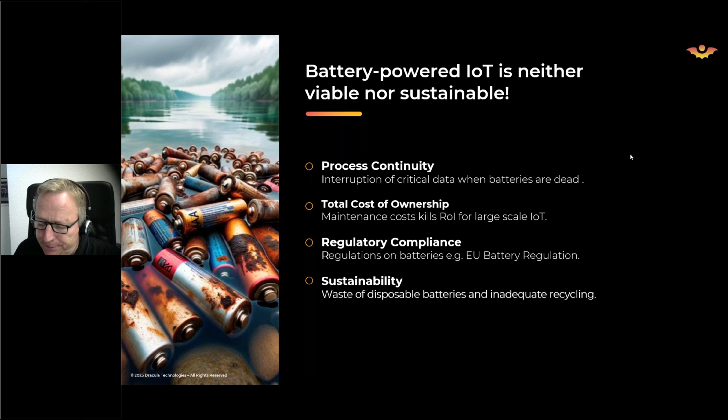Graham just mentioned briefly, there's other wireless protocols in the IoT space that are now embracing and adopting energy harvesting into their protocols. Of course, Bluetooth is also getting into this.

We know that a company called Wiliot has RF harvested Bluetooth sensors, which are almost like RFID tags or labels, that are now making their way into the logistics space. We know that the British Royal Mail is using that, and it's kind of a game changer compared to passive RFID.

Then there are other standards like Zigbee that launched Green Power already some years ago. And as Graham mentioned before, Ambient IoT is the credo that 5G, or the 3GPP consortium, is launching. There will be in Q3, in release 19+, an Ambient IoT spec for energy harvested devices, which will make those devices much more energy conservative in transmitting data.

I mentioned TCO, and I brought a case here that I was actually exposed to with a large IT services company globally. They deployed about 50,000 sensors in about 50 buildings, I think in 15 countries.

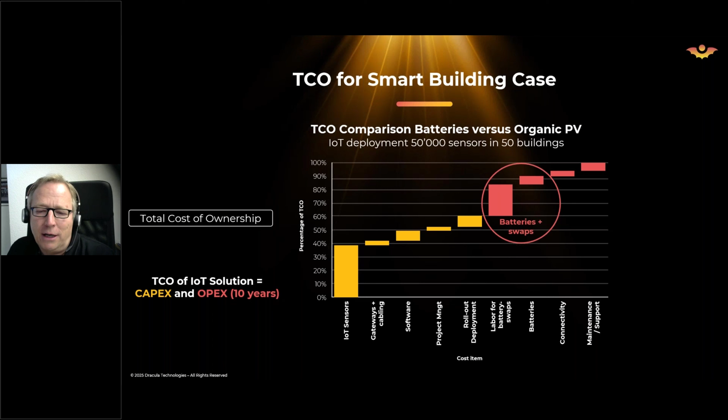The batteries, depending on what type—lithium, alkaline, or something else—are also a significant portion of the cost. Then there's the wireless communication cost, connectivity, and about 5% for overall maintenance and support costs. So you can see the batteries make up a large part of the total cost of ownership. Now, if you benchmark against an organic photovoltaic solution instead of a battery solution, it looks like this.

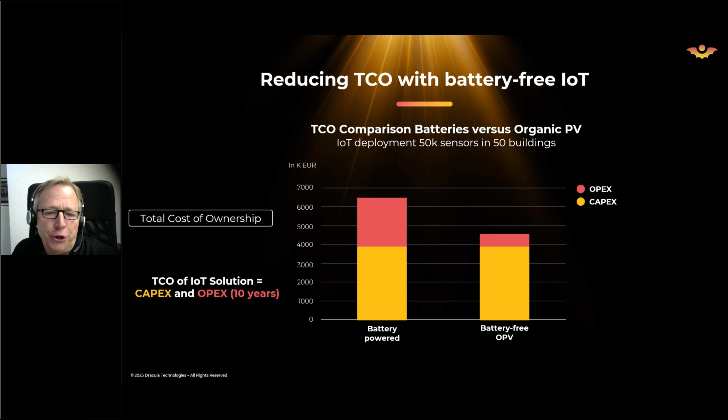We just saw the battery power solution on the left side, and on the right side you can see the OPV-based solution, which has a much lower operational expenditure cost. The battery solution would cost over 10 years about 6.5 million euros, whereas the organic PV solution costs 4.5 million. So they're actually going to save 2 million euros if they do the organic PV solution.

Now, energy harvesting—I don't think I have to tell you, but for those who are not familiar, we are in the light business. My previous speaker, of course, is in the kinetic business. And then there are also other sources of energy harvesting like thermal energy and RF, radio frequency.

Within light harvesting technologies, everybody knows the typical solar cells or photovoltaic cells. They've been very common for 40, 50 years, used in pocket calculators and now on the rooftops of buildings. That's completely different from organic photovoltaic, and I'll show you in a minute.

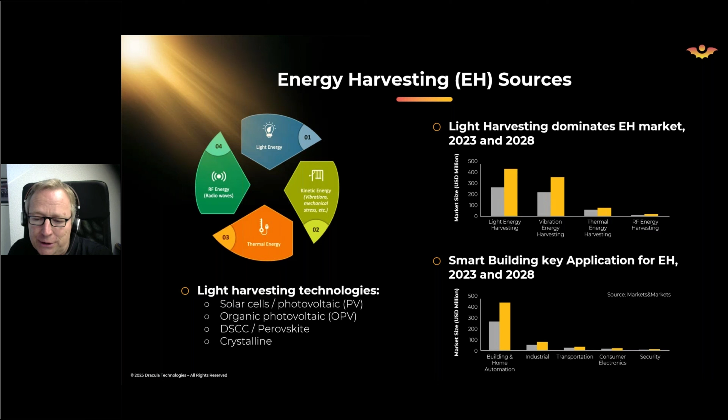So organic photovoltaics, the product that we, Dracula Technologies, are manufacturing, has some very unique features. First of all, it harvests at very ultra low light. I'm talking about lux levels that can go below 5 lux.

In a typical office space, it's around 500 lux. So talking about 5 lux, it's almost like there's no light at all. That makes a big difference for many applications, because the robustness of a sensor and its performance is guaranteed even in almost dark environments. And that's a game changer.

The other thing is that we do inkjet printing for manufacturing those modules, which gives us complete flexibility in terms of shape, number of cells, the form, the layer, and the coating. So you can just pick whatever design you want. We'll manufacture that, in small series or large series.

Thirdly, it's all organic materials. We don't use any rare earths. We don't use any toxic materials. The lifespan has to be very long, because you don't want to swap modules—actually, you don't want to have to swap batteries. So we can guarantee 10 years and beyond.

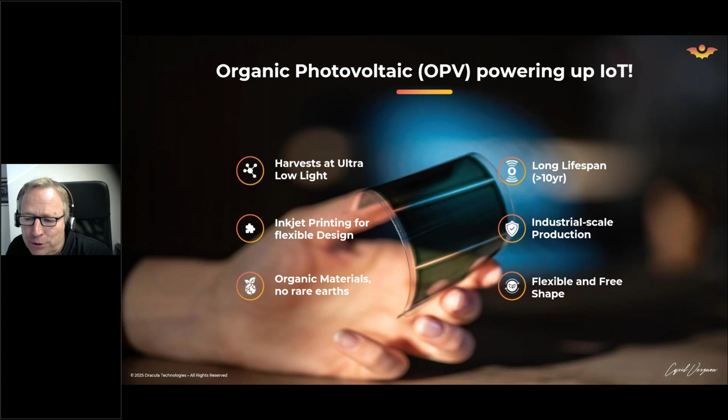We've done aging testing and we get T80—80% performance still remaining after 10 years in indoor environments. And we produce at industrial scale, where I will show you the new factory that we launched last year.

So in terms of design flexibility, I'll show you a couple of examples of what we can produce and what we have produced for certain customers. Anything goes, right? Sky is the limit, in terms of shape, number of cells, and how they're going to be configured.

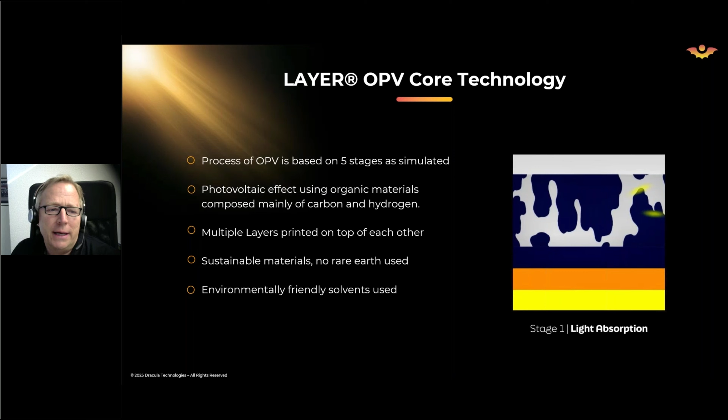So the core technology is organic photovoltaic, and we call that Layer, which is our trademarked product. You can see at the right side an animation of how that works in terms of the photons and electrons. It's based on a 5-stage process, and the simulation shows those different stages at the right.

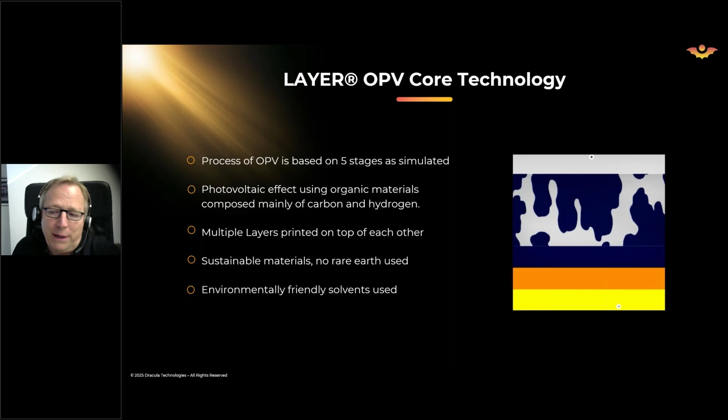It's all about organic materials from carbon, hydrogen. It's multiple layers that we print on top of each other. Sustainable materials, no rare earth use, and the solvents we're using are environmentally friendly. So really green technology.

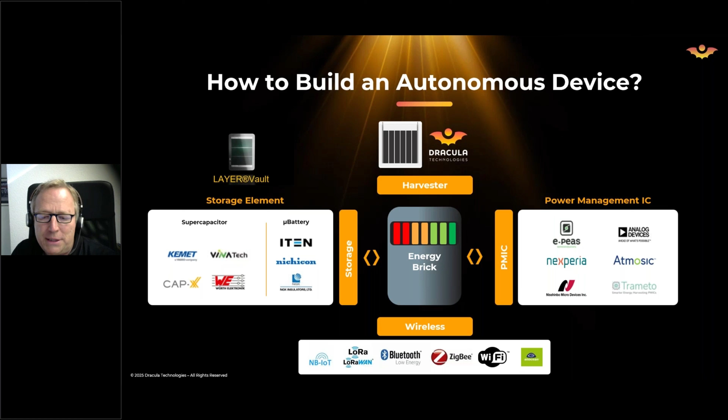At the right side, you see the different power management IC options that we typically work with in creating those energy bricks, because the PMIC needs to operate and manage the flow of energy between the PCB and the storage, between the harvester and the storage, between the storage and the PCB. So you really need that PMIC in most of the applications.

What kind of applications have we been working with our clients on? Of course, smart buildings, be that temperature, humidity, or air quality monitoring, or room sensors. This is a mainstream vertical that we're working on, and that's why we just joined the EnOcean Alliance last year.

Secondly, smart asset tracking, very interesting, because you don't want to replace batteries in warehouses and logistical centers. There's a big demand for trackers or cold chain loggers that can operate without batteries and hold data for a long time, be that on a container journey across the world or on a truck journey across Europe. So energy harvesting in combination with storage is the way to go.

Then we're serving other verticals. You see here electronic shelf labels, ESL. Think about a store which has 10,000s of ESL labels that will hold for a year or a little longer and then have to be replaced, which is a huge operation for the store to exchange all these labels. So we work with basically all the main ESL manufacturers to bring products to market that can do a batteryless solution.

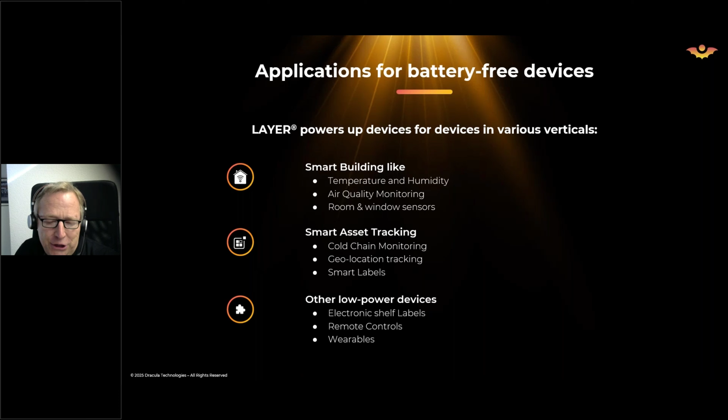And of course, remote controls and wearables are other applications that we actually work with clients on.

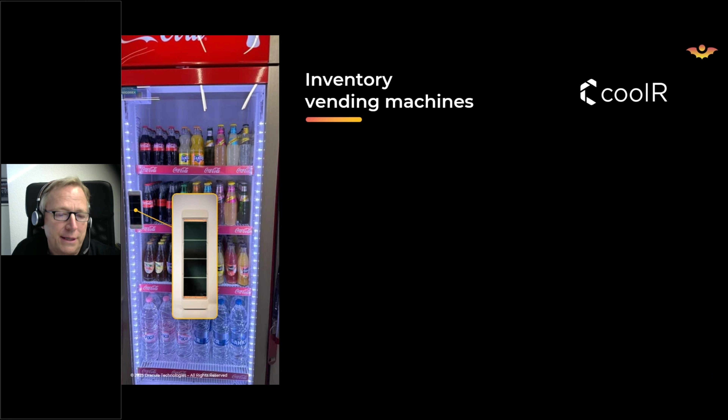I brought 3 examples of customers that we can talk about in public. One is CoolR, an American company that created a solution to solve a problem that vending machine operators are facing. The challenge is if they want to do stock taking, this is very labor intensive. So if you can automate that with an AI camera that sits inside the fridge, you can save a lot of travel for people to operate those vending machines.

So the solution is to connect that AI camera to a cloud application that transmits data either every hour or every day. And the sensor is powered by organic PV from our company, Dracula, which is harvesting ambient light from the surroundings. And it makes the sensor basically completely autonomous.

It's quite a big storage element inside this sensor that also makes sure that even when it's completely dark, it will still work properly. They have designed this to work 9 months in a complete dark environment. So this is a very robust way to solve this problem.

And also the battery, if it would not work because of cold conditions, there's a way to actually work from the harvester. So it's a hybrid solution.

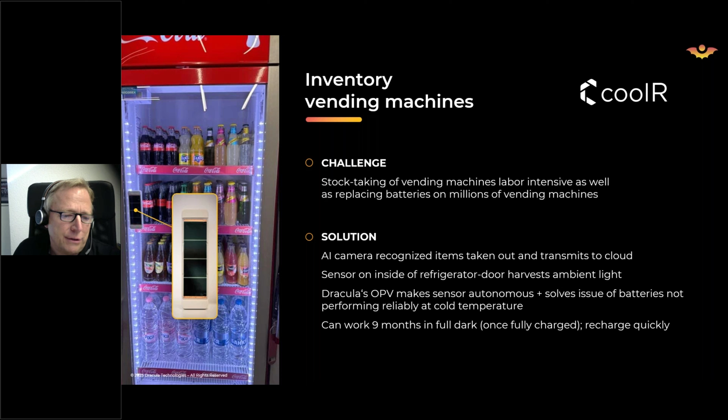Then smart labels. There's a Swiss company called Truvami that has created a smart label that can log data on the journey through logistical operations in warehouses or industrial applications, and can provide geolocation data outside as well as inside.

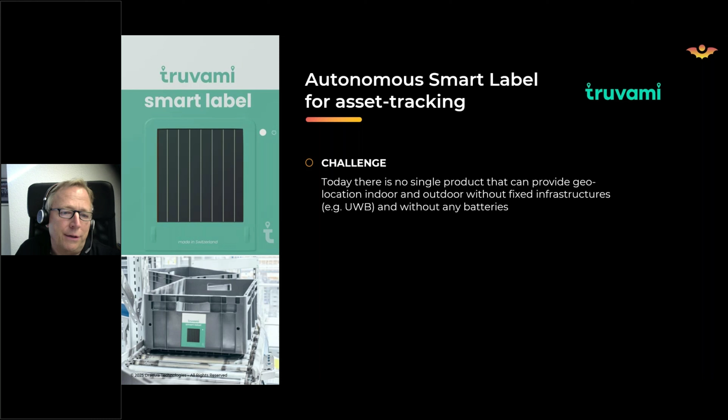So that's a real game changer, and this is done without batteries. With this label you see here, you can get a location, but even temperature and other condition data, wirelessly communicated through a LoRaWAN network that communicates with the cloud application of the client and provides full visibility on the assets that are carrying such a smart label.

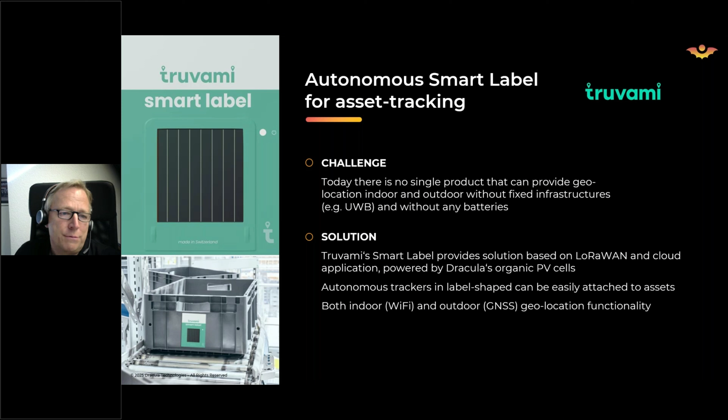This is actually like, you could say, RFID 2.0, because it brings real-time location tracking up to a new level, completely passively, completely autonomously. And this is, as Graham said, ambient IoT.

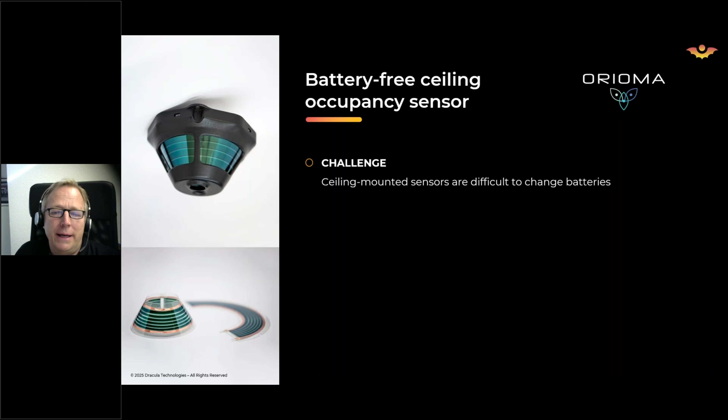In the smart building space, we have a customer called Orioma, a French company that has created ceiling-based presence detection PIR sensors. The challenge here, of course, is how can we avoid that people have to climb a ladder to change the batteries. That was the main challenge, and that's how they came to us.

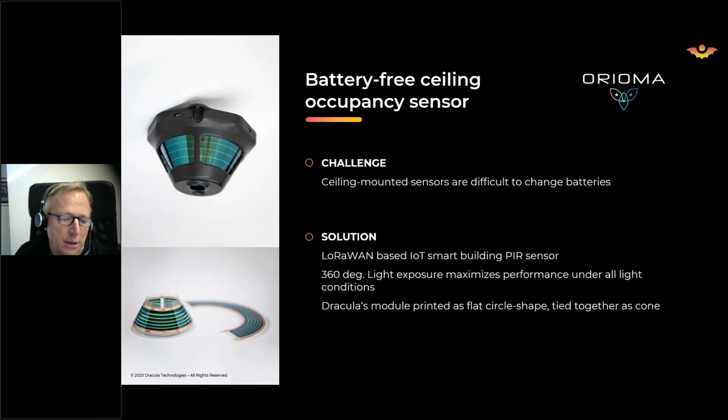This is a LoRaWAN sensor communicating wirelessly. The smart thing they did here is they created a 360-degree angle, so it's actually catching light from any direction. Since we're as flexible as it has to be to produce such a flexible OPV module, you can see at the lower left that we just produce half circles that you can fit together as a cone, which goes into those sensors.

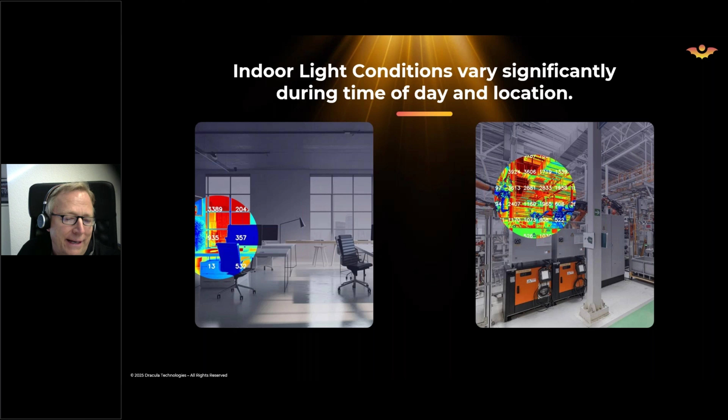Now, light is not something that's pretty stable in an environment like an office space. You see here a snapshot of light intensities. At the window, you will get like 3,400 something lux, but if you look under the desk, you only have like 13 lux. So there's a huge variety in light intensities inside a room, which you would never guess, which requires a sensor—for example, a desk sensor that sits underneath a desk to detect where people are working—to be able to harvest light from only 13 lux. That's where we're coming from.

It makes solutions very robust because you don't have to worry too much about whether there will be enough light, which many customers are asking us, and we show them that this is possible. It's a game changer.

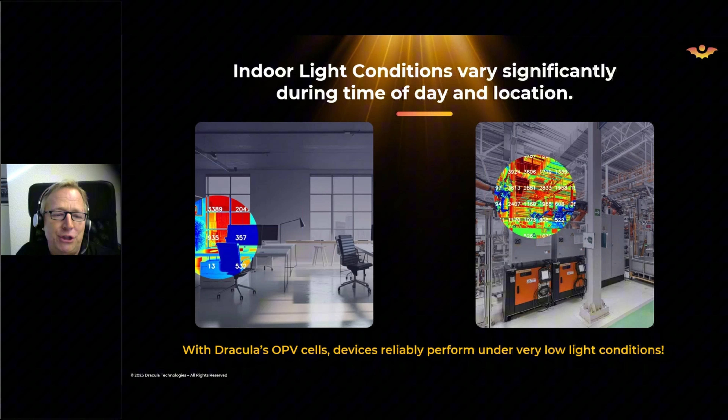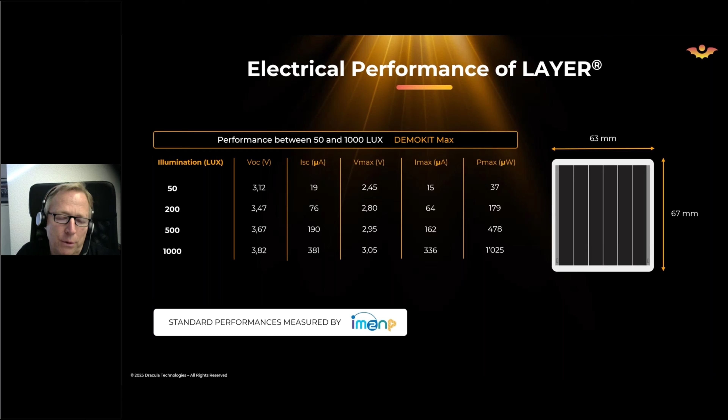This is to give you quickly a feel for how much electrical performance you can expect from different modules. The module I show at the right side here is like 6 by 6 centimeters. If you look at say 1,000 lux, the lower row, at the most right column, the power max, you get like 1,025 microwatts out of this module, which is about 1 milliwatt, which for most low power devices is enough to have a properly designed PCB.

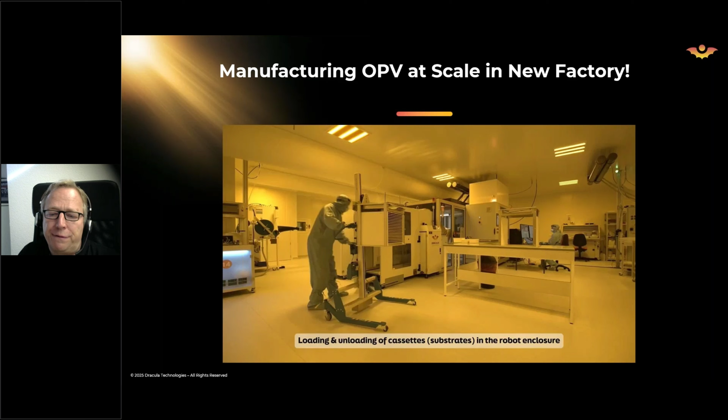As I said before, we opened up a new factory in France to deal with all the large demand we're getting for producing millions of OPV modules, and I'd like to give you the gist.

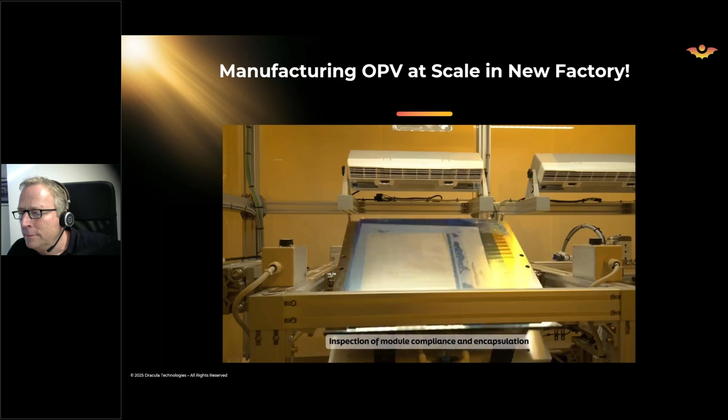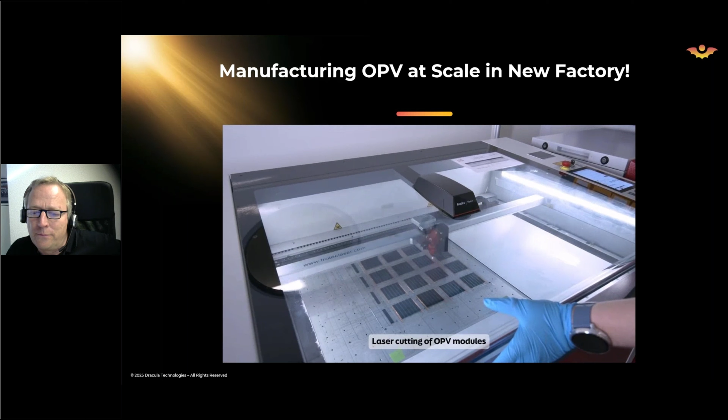I thought I'd show you this because some of our prospects and customers say, hey, inkjet printing, that sounds easy, right? No, this is high tech, this is clean room manufacturing to get to this kind of high performing organic PV modules. And it took us more than 10 years to get here.

We're well funded by several tech companies as well as financial institutions, and we invested at least 10 million euros just in R&D to get to a product that can be manufactured on large scale, high performing, low cost. This factory is ready to manufacture at least 150 million square centimeters a year at one shift, and if we go to 3 shifts, we're close to 500 million square centimeters a year. So we're ready to roll.

We have a team of more than 40 people working in Valence, in the southern part of France, and we've got like 29 patents granted or pending.

Before I close, I want to show you this latest product that we launched last year. We got a couple of awards at CES and other big shows for this game-changing innovation, which combines at the front side the energy harvesting module, organic PV, with a printed storage at the back, at the flip side of this thin film flexible product. So it gives almost a complete replacement solution for any batteries that go into sensors, and you can shape them in any form.